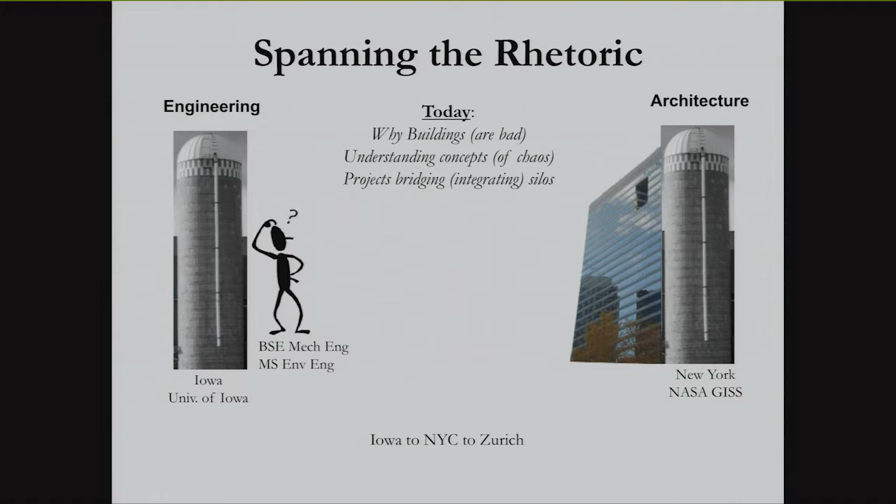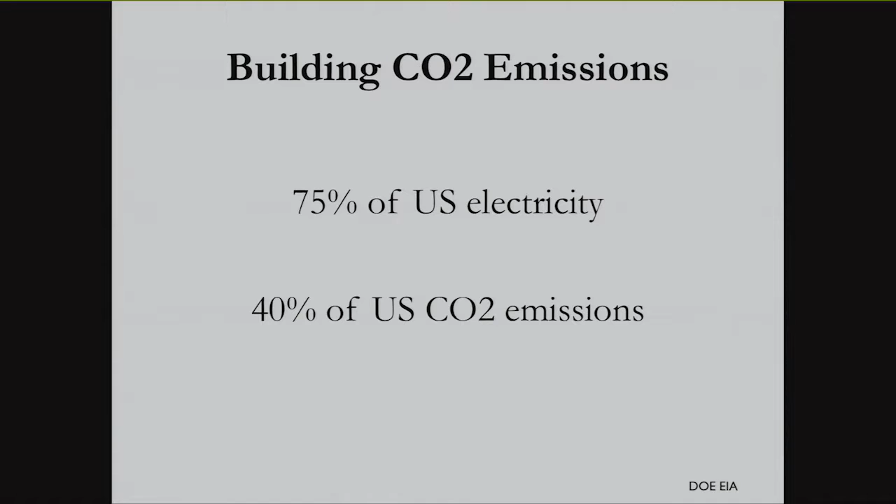So why buildings? Well, the obvious answer is that if you look at the data from the DOE, 75% of US electricity is utilized in the building sector, and around 40% of all the CO2 emissions is attributed to buildings. So that's a pretty easy motivation. But the problem is when you look at this big Sankey diagram of where all the energy goes in and then ends up producing carbon dioxide, cars are pretty easy. Oil in, cars drive, and boats and planes. It's pretty straight across. But buildings are everywhere.

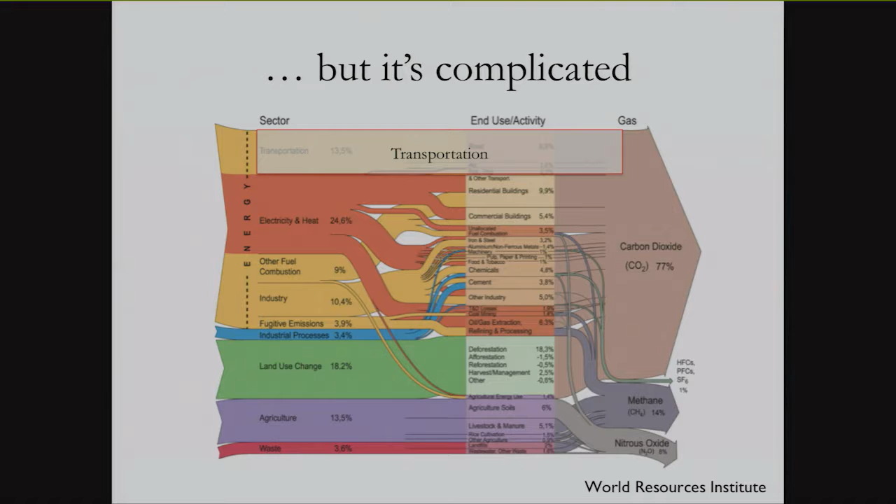Buildings are part of the energy sector, right? There's not actually one thing on the left that says buildings. There's residential, commercial buildings, there's agricultural aspects that involve buildings. So really it spans all these different places. And so in order to really address that, we have to think both holistically and integratively. So we have to think about opportunities that really span disciplines.

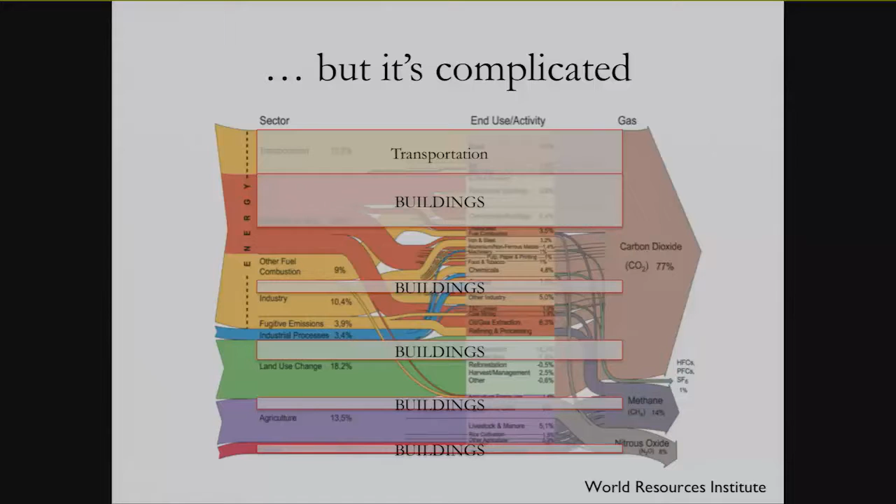Bridging as a theme for the talk today is something I hope we can all relate to and how we can address this problem, not just in the context of disciplines and areas, but also in terms of climate change and the ideas of mitigation and adaptation.

Buildings are large generators of emissions, as we just saw in the statistics, but they're also the parts of our infrastructure that are most vulnerable to things like temperature rise and sea level rise.

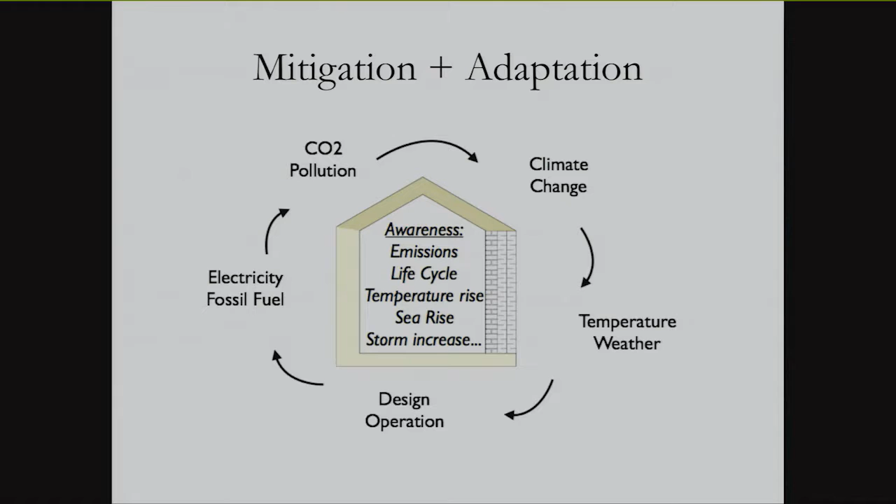One of the funniest feedback loops, if you think about climate change, is I have to understand how buildings lose and gain heat. When the temperature starts to rise due to climate change, that changes how we design buildings, which changes how much electricity they use, which then changes the CO2, which again changes the climate change. Understanding how buildings play a direct role in all of these aspects of climate change is really critical.

At the end of Ralph Cicerone's talk yesterday, we had this slide of the bell curves with the extreme events right at the high end of the temperature scale. So what is the worst case scenario?

In the context of our built environment and urban spheres, what you see here is Southwest Asia, the area of the United Arab Emirates. One of the fascinating things that comes out of the data when you look at what happens at the end of the century is, in the high emission scenarios, we have places on the planet - that whole purple section - where the temperature is above what you can physically survive, because the wet bulb temperature, similar to the dew point temperature, is the point at which your sweat doesn't evaporate anymore and your body can no longer cool itself down. So extended periods of time outside in these zones are no longer inhabitable by humans.

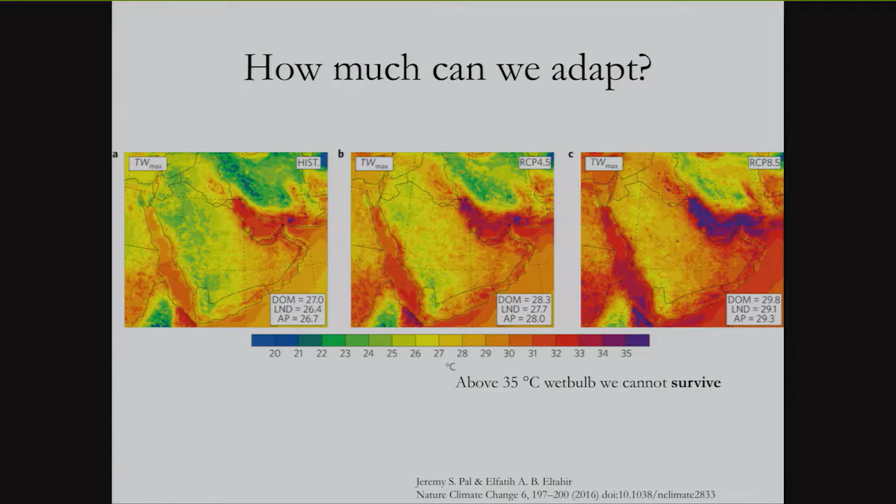The only way to live there would be in some crazy, hyper-futuristic, indoor air-conditioned environment. I don't know if that's something we all want. Maybe somebody wants to design it with me for fun in a studio in architecture - they would get a kick out of that. But I think as engineers, this is also a huge motivation into how we address the building sector.

But architects aren't so excited about equipment. And if you're going to have a building that wears a hat, you better have a pretty good reason why the building's wearing a hat if you're an architect. It can't just be because you want PV panels and to catch water. There has to be some sort of design motivation that's really powering their project.

Understanding that is really the part that my engineering side struggled with for a long time - that there are rational arguments that don't have to do with numbers and figures and data for why things get built and why we do certain things. I think that really rings true in this idea of behavior and how we as a society also need to understand all the different aspects, both the engineering and the aesthetic and the design components, and how those all blend together.

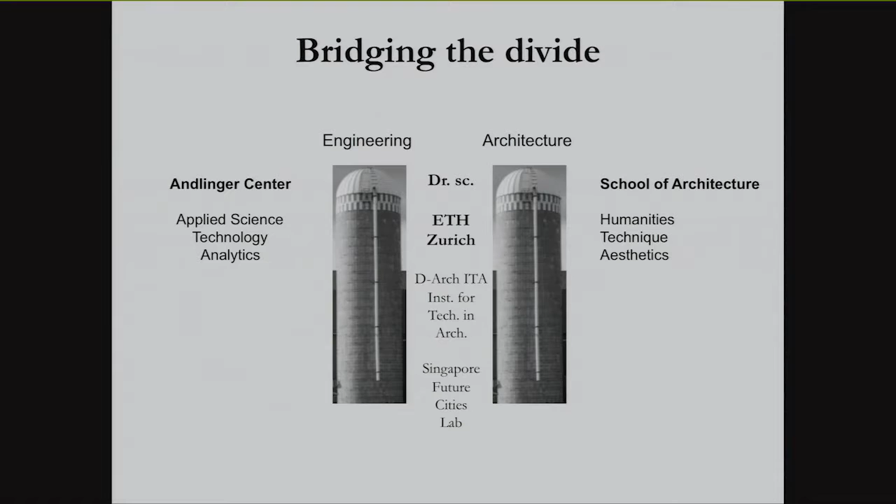The first place that I finally started to account for both these things was when I went to Switzerland and did my PhD in the architecture school in the Institute for Technology, and then moving on, continuing to work for the ETH in Singapore, really taking these two disciplines and figuring out one way that I could talk to both of them. The funny thing was, we ended up not making things simpler, but actually making things more complex.

So when I arrived here, we continued that theme, sort of in this idea of the chaos lab, because chaos isn't just an acronym, as Peter mentioned, which also I think Ellen demonstrated quite well yesterday - that acronyms are effective tools at communicating very quickly a project scope.

But for me, the acronym CHAOS, Cooling and Heating for Architecturally Optimized Systems, is just the tip of the iceberg. Chaos for us also represents this idea of thinking beyond the simple energy balances in buildings and the simple mindset of how buildings operate.

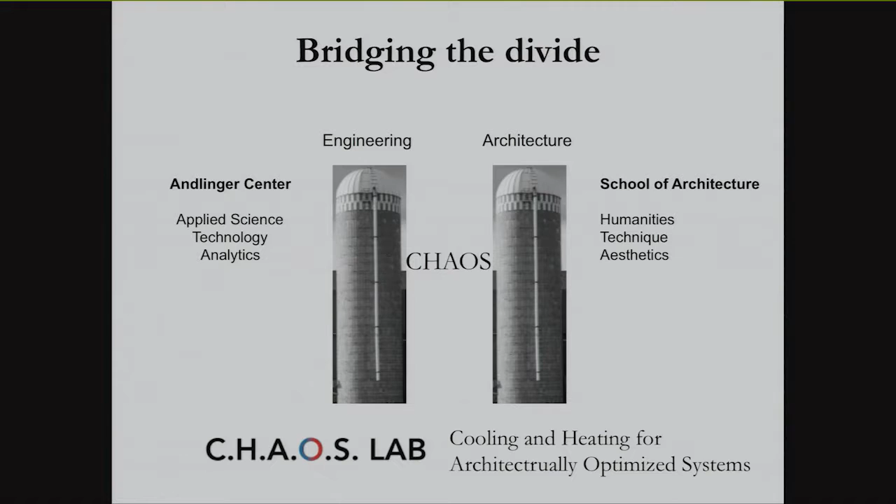So it has to do with entropy and this concept of combining the entropy and the second law of thermodynamics, how things dissipate into the environment, with the idea of energy balances.

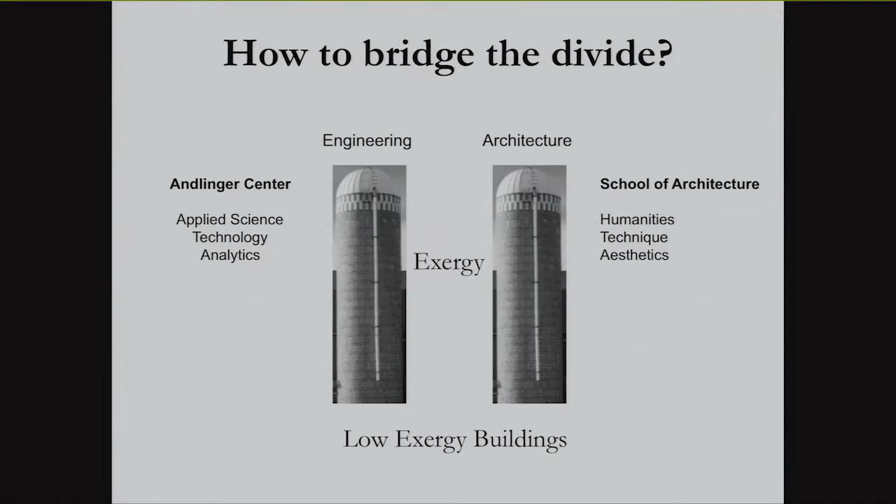The simple thing that we do to figure out how energy efficient buildings are is balance the amount of heat that we put in and the amount of heat that the building loses, and we try to minimize the energy inputs. But there are many steps along that process of bringing energy in and out of buildings that are extremely important.

So exergy as a tool ended up being extremely effective because the interesting thing was when we went and talked to architects about this phenomenon, all of a sudden energy wasn't this boring thing that they had to learn prescriptive metrics for. There was actually a phenomenon, something beyond the traditional mindset, which excited them.

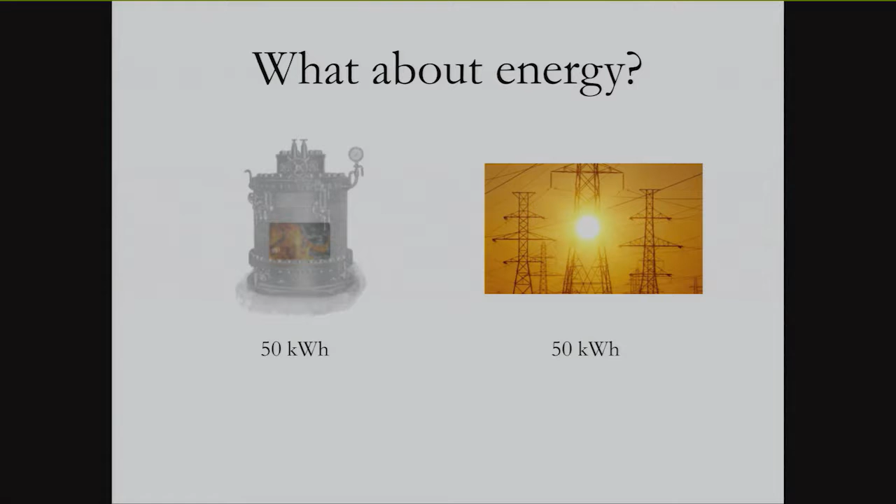We are actually very effective at communicating ideas like simple things about exergy being the value of energy. We all understand quite quickly that 50 Singapore dollars are not equal to 50 US dollars. We have a similar problem with energy. We can have 50 kilowatt hours of heat in a boiler and 50 kilowatt hours of electricity.

But these things are not really the same. I can do a lot more with 50 kilowatt hours of electricity than I can with 50 kilowatt hours of heat. There are fundamental limitations in the second law of thermodynamics that tell us how much I can extract from certain temperatures in a system.

So in general, when we quantify, especially at the district scale, district heating systems and electricity grids, we often just add up joules or kilowatt hours, but we don't necessarily take into account what the temperatures in the systems are.

That's something I'm working directly with facilities on now, thinking about the campus steam system and the district cooling system that we have on campus, about how we can really optimize those in our campus as a lab.

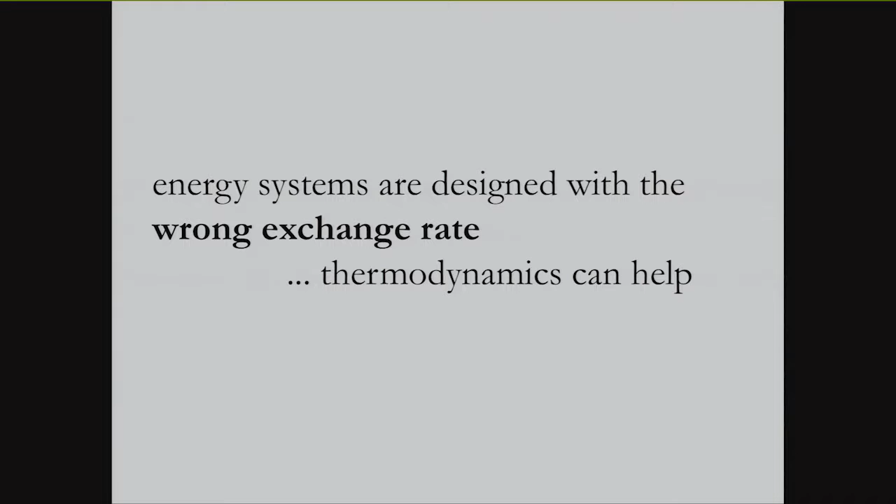The main part, not to delve too much into the details, is entropy just allows us to create a new part of the energy component where you actually have some loss in the ability to utilize the energy that you have in a system.

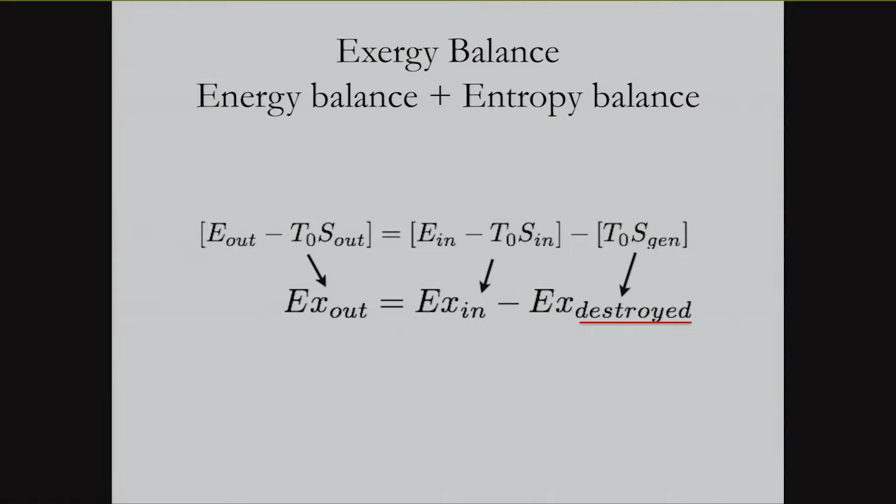So you subtract the amount of entropy generated in this system. The main thing to take away from the equations, when I apply this to a building, is that the temperature differences matter — as I bring heat into a building, I need to make it warmer so that the warm heat transfers to the colder space. The warm, hot temperatures transfer to colder temperatures. And the exergy part is really just that temperature difference.

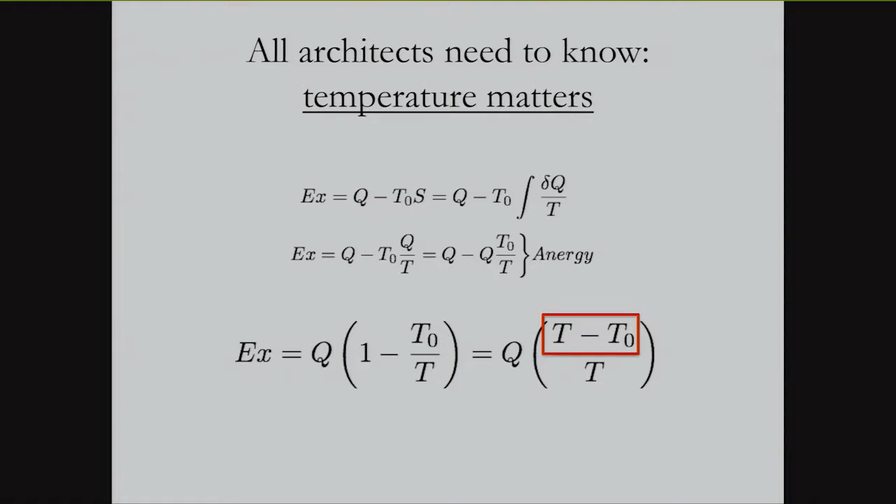The big take-home message, which has been really effective both in engineering and architecture, is that if we design buildings just with simple energy balances — here you see a 98% condensing boiler system, where just 2% of the energy is lost out of the stack and all the heat goes into the building — the difference is, the heat in the boiler is about 1,000 degrees, but the room only needs to be 20 degrees. So there's a huge mismatch in the quality of that energy.

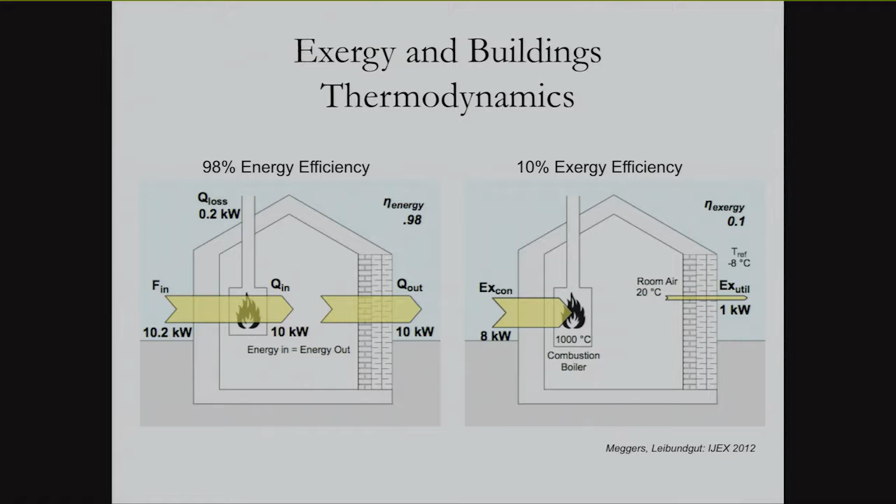So the exergy that was available in that combustion would be much better used for another process that needs that high level of quality in its system. For my research, one of the big areas is how we combine systems that bring those temperatures closer together. That's why ground source heat pumps are great opportunities — the temperature is much closer to the room temperature than, say, a minus 8 day outside.

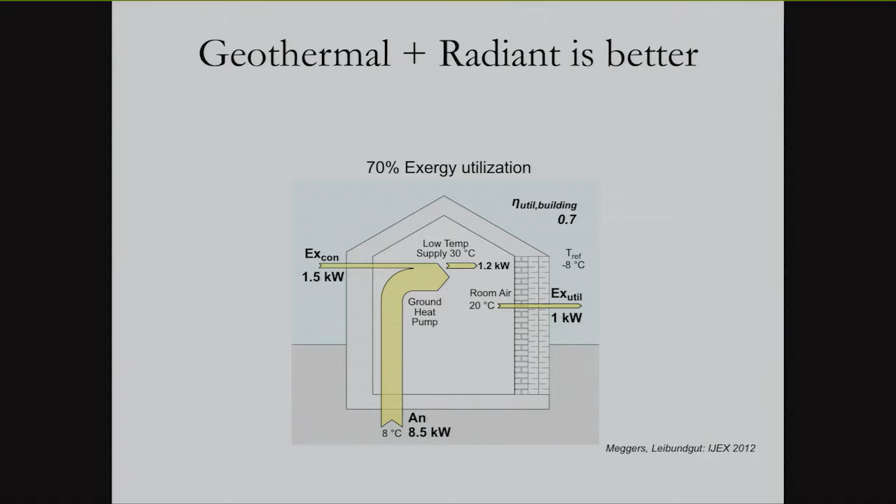And same with the emission systems in buildings. If we use large surface areas and radiant systems, like we have here in the Andlinger Center, which I'll talk about later, we can understand how temperature really matters. That's the simplest message we can deliver to architects and engineers in this context.

So I can design the surfaces in this room to emit the same amount of energy as the little diffusers, if they're large enough, because the amount of heating or cooling I can give to a room is limited by the temperature difference and the surface area.

So if I make a big surface area, I can make the temperature difference much smaller. But unfortunately, this fact that temperature matters is problematic in standard systems. This was something I experienced directly in Singapore, and we're continuing these thoughts with Elie Bou-Zeid and Jim Smith.

in this Sustainable Research Network on urban water, in the context of how latent heat transfer happens with all these different devices. The main thing in this project was, what do you think happens to the heat from this air conditioning unit? It goes this way, right? And all of these units' efficiencies depend on the outside temperature. But do you think it's the outside air temperature around these units? It's not. So these units are working way harder than others.

The other thing is this whole area also gets hotter, and we have a whole project about back lanes in Singapore showing there's a huge opportunity to not only increase efficiency but reclaim this space that nobody wants to be in, because it's 10 degrees warmer than the regular outside temperature.

We also took those systems sitting on the wall there, just tacked on, that people can buy in any DIY hardware shop in Singapore, and thought about ways we could integrate them better into buildings, because even the large buildings and apartments I lived in still use these standard systems.

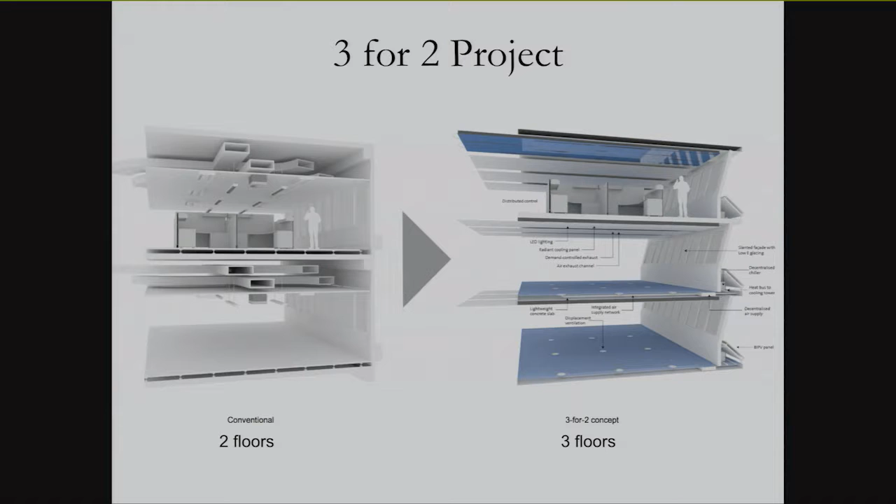In this case, we also explored opportunities to directly integrate the compressors and air intake systems into the facade structure, so we're not ducting things any further than necessary, which allows us to create even smaller ducts with fewer losses.

When we modeled this in larger high-rise scenarios - we just had a paper come out 2 weeks ago in the Council for Tall Buildings journal - it showed we can save energy because we diminish all the surface area on the outside of the building. Remember, those 2-meter spaces also had surface on the edge of the building. We get rid of that surface and reduce all those heat gains.

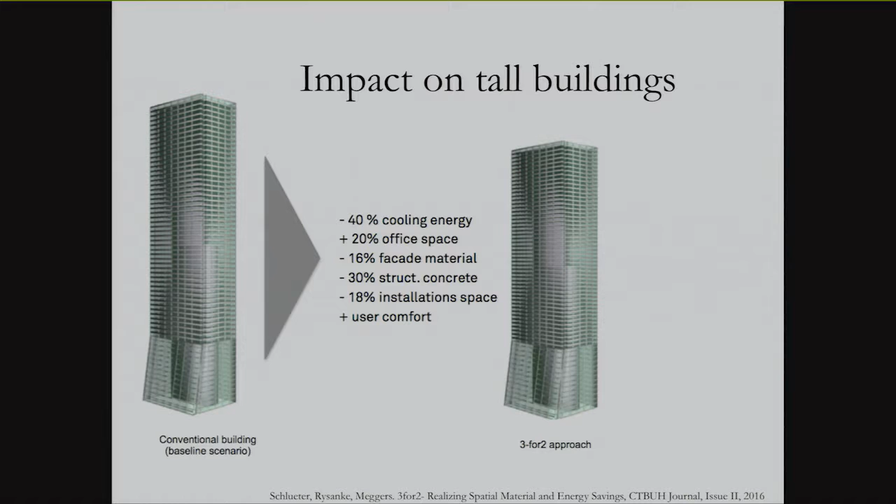So we save 40% of the cooling energy, we get 20% more office space because we don't have all those ducts - both the vertical chases and the ones running through the ceiling. We also save tons of material and increase user comfort through this radiant cooling system in the building.

So this was the end result of the space we designed and implemented at the United World College, which they very generously allowed. This is one of the hardest things about doing research in buildings - buildings are in fact the most expensive thing someone can buy.

So if you're going to sell someone a building, you're not going to say, I have this thing that I think just might work maybe - we haven't really tested it, but can we put it in your building? Luckily, we found a project manager who was pretty proactive in Singapore, and we were able to actually deploy this project.

These are high temperature cooling panels in the ceiling of the space, distributing the cooling over large surface areas.

And we're looking at the next step: understanding how do we deliver this. Anybody who's been to Singapore will know about this challenge, dehumidification, because it is humid there. The temperature is rarely above 85 degrees, but the humidity is always above 80%. So getting rid of moisture is a big challenge.

The way we traditionally do that is by cooling the air down beyond the dew point, causing water to condense out of the air. But we can also do this using intelligent chemistry. We've been doing a lot of research with chemical engineers, including one chemical engineering grad student I convinced to come work with me on the architecture side, to develop new desiccant-based dehumidification systems.

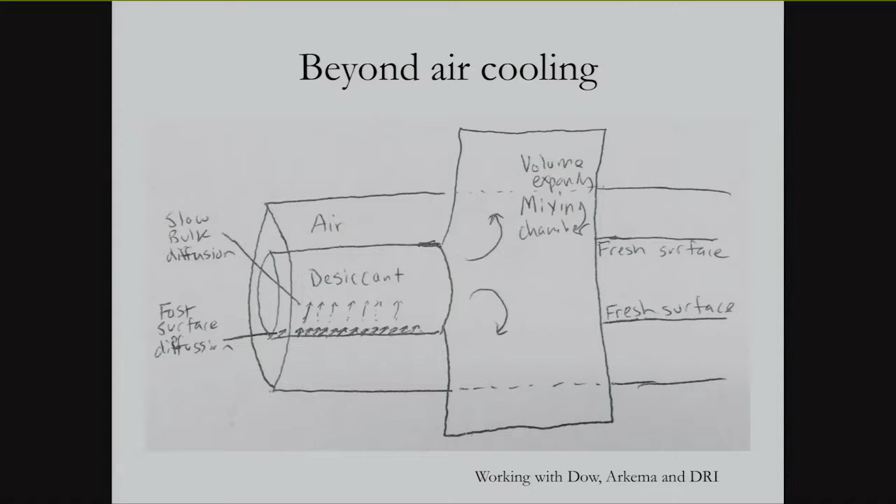This is an early sketch of a prototype we built. Through one of the e-affiliates meetings, we met people from Arkema who supplied us with a perfect non-porous membrane, because the desiccant we're working with we were able to get, through another industry meeting, from Dow. So Dow has this desiccant they wanted to try out, and we got this membrane that allows moisture to transfer through it but keeps the desiccant hidden behind it.

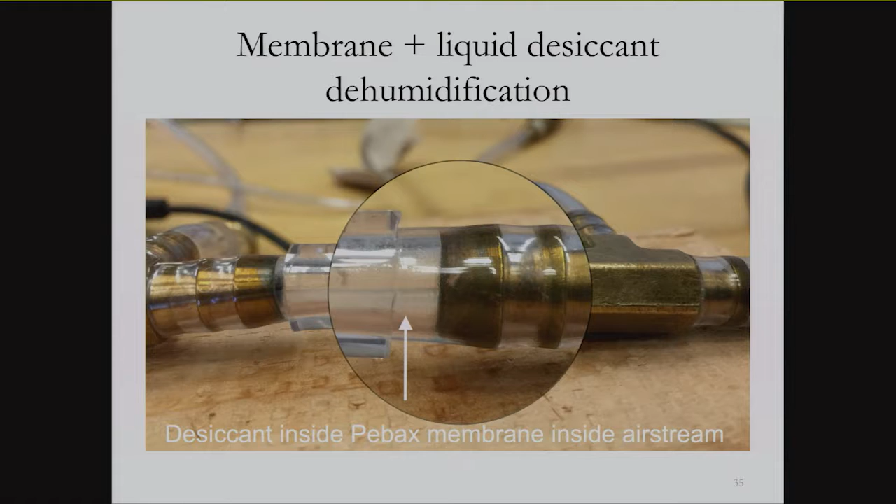In that way we can transfer moisture in and out of the liquid without having an open or free surface. One of the biggest problems when you use desiccants to pull moisture out of the air is that free surface, and the air isn't just air, there's dust and other components. So this is one of the things we're designing right now to address this problem, and collaborations with chemistry have taught me an immense amount.

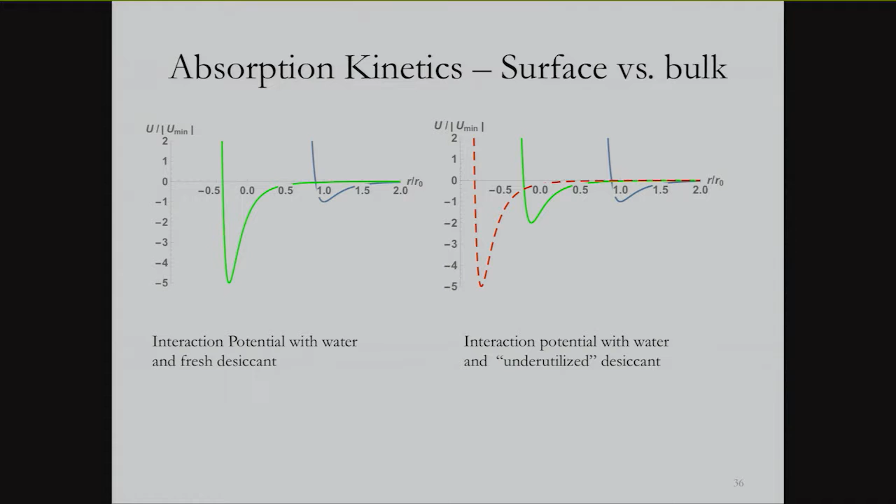We've had a lot of help from Bruce Koel as well as Jay Benziger about how the kinetics work in the system, and how we can optimize the removal of moisture from the air in buildings. My part of the system is to come back and say, okay, the really neat opportunity would be...

Now let's design something where we have photovoltaics on the facade. Photovoltaics get about 20% of the energy from the sun, at best, converted into electricity with market types of PVs. But they also generate a lot of heat, and that other 80% of incoming energy can be used to regenerate those desiccants. So it's nice to think about a system where, instead of subcooling air to condense water out, we heat up a desiccant to remove moisture from the building system.

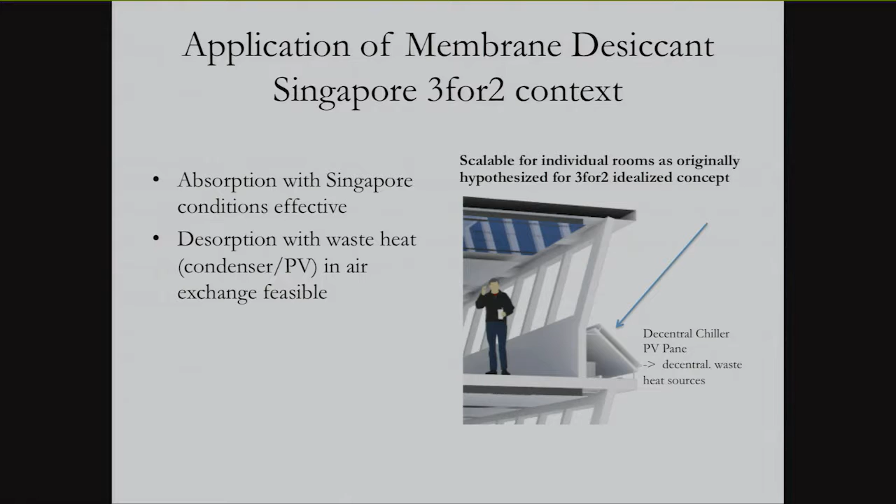Because what do we have a lot of when we're doing dehumidification in Singapore? We have a lot of heat. So let's use some of that heat to drive our system instead of doing subcooling. The initial results from the desiccant we're working on are pretty promising in terms of achieving realistic temperatures, so we're really excited about that.

I want to jump to one more project, or a couple more projects, that are really more on the level of the interdisciplinary nature, and how, in my role, that last part of the project where we design something is really where we get to do this innovation through integration - taking the structural parts of the building and these chemistry equations and bringing them together.

So we made a proposal, and it seemed a little far-fetched, but in the end, it all fit together just enough that we were able to do experiments and demonstrate that we could, on the top right there, in fact, store charge in concrete. The biggest challenge that remains now is to keep the charge there.

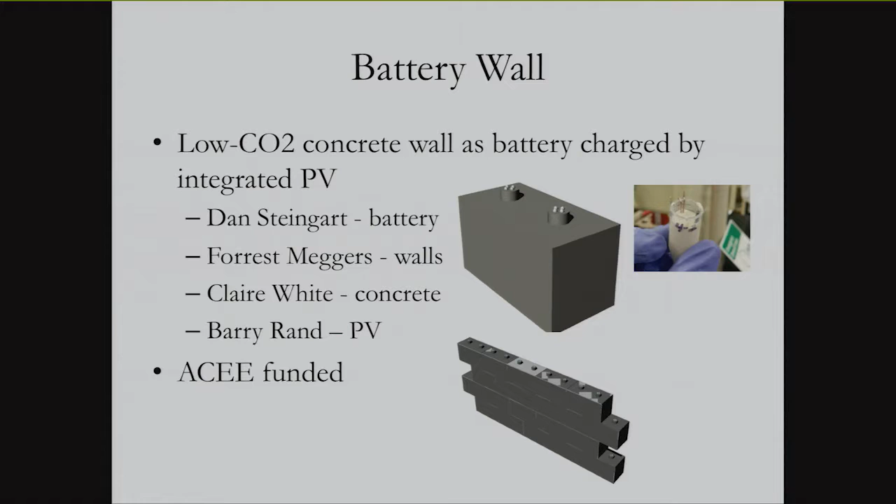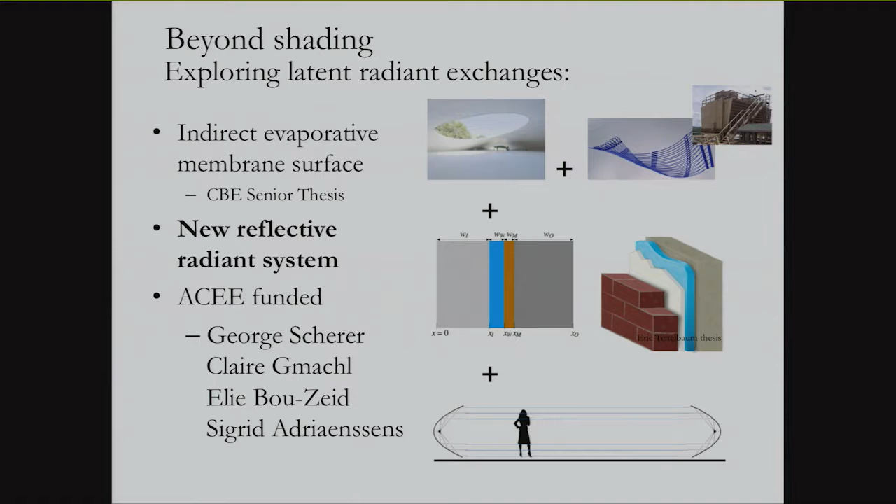The other project that I led, which this project and the battery wall were both funded by the Andlinger Center, and in this case, I was leading the charge on an idea about how to combine evaporative cooling with the reflection of radiant heat transfer. And ideally through this, we'll arrive back at the sensors that I'm passing you.

The first part, which I'll just touch on briefly, is the idea that you can do evaporative cooling directly on the walls of buildings. This is something that Elie Bou-Zeid in civil engineering and I have been talking about a lot, and thinking about ways that you can encapsulate water in building facades.

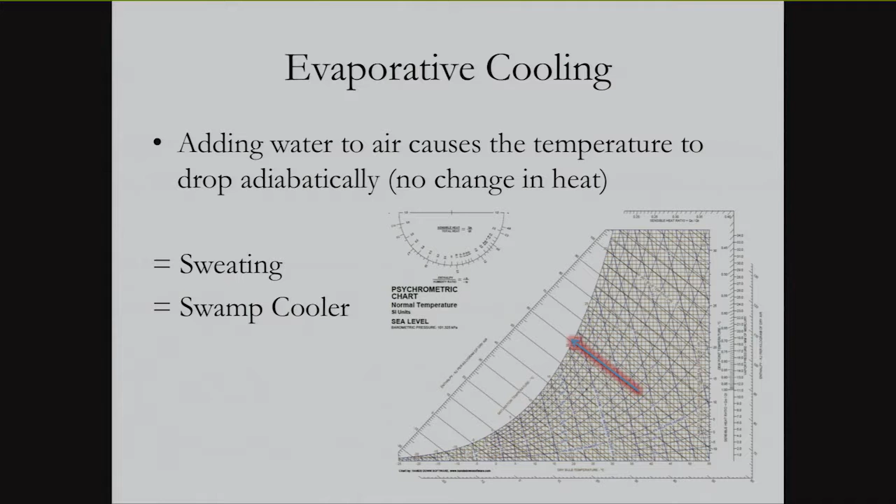But in the project that I worked on, we did what's called indirect evaporative cooling. Because in New Jersey, if you buy a swamp cooler, it's not going to help you much in the summer, right? 70% humidity, and that maybe cools the air by 5 degrees, but then it's 100% humidity. That's not much better. But if I take that 5-degree cooler air and do another heat exchange with some air that you didn't add moisture to, now you have cooler air that you can use in your system.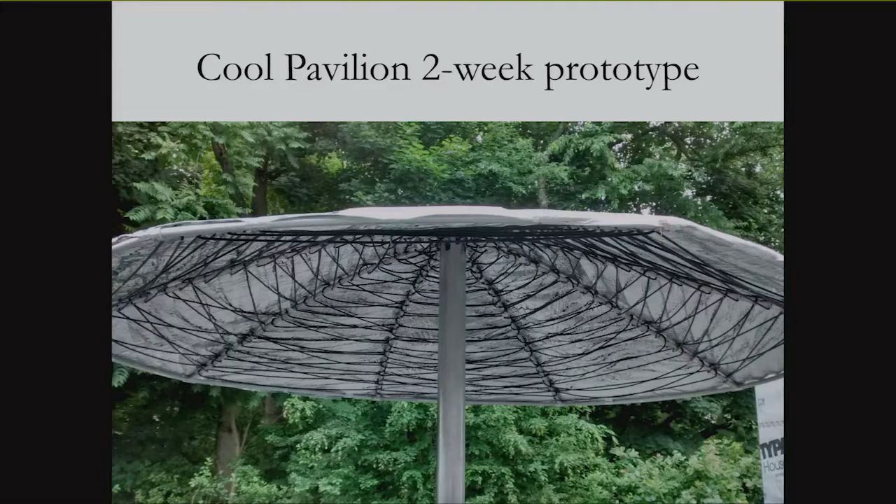And that's what we did in these prototypes that we built, that focused on reflecting then that evaporatively cooled, indirectly evaporatively cooled fluid that we have in the system.

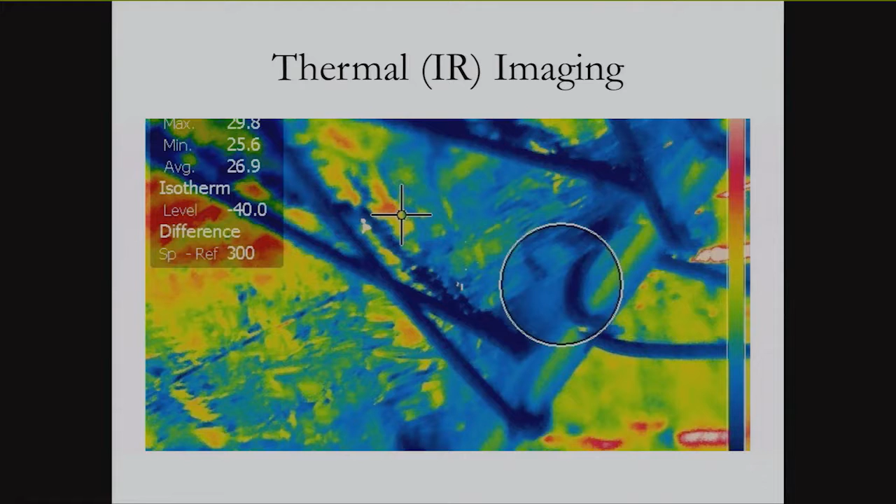And this was the first prototype that my students built in remarkably 2 weeks. Architects are extremely good at fabricating things. Unfortunately, though, we found that the reflection underneath this little umbrella was not very effective, so we had to come up with a better plan, one that involved more geometry.

And this is where really the architects sort of took the lead and helped to develop a geometry where we did a bunch of ray tracing and figured out, hey, if we try and build a parabola in this image, what we want to do is reflect all the heat off of the people onto a really cold pipe.

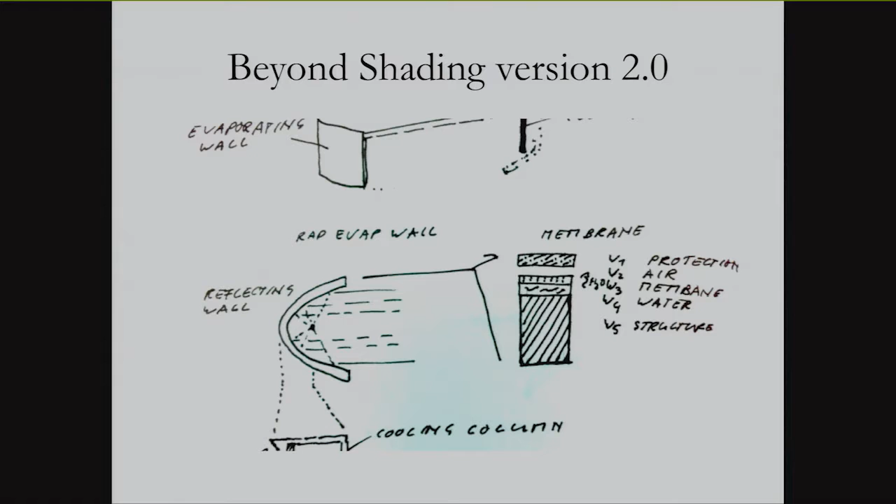So you all are emitting heat, and I can make you feel cold if I just surround you with a big, huge chunk of ice, because you'll radiate heat, even if the air temperature stays the same. So the whole point of the project is to absorb radiation from people and focus it on cold things. But we emit radiation in every direction, we don't emit it like a beam. So we had to come up with a way to capture all that indirect, those off-axis rays.

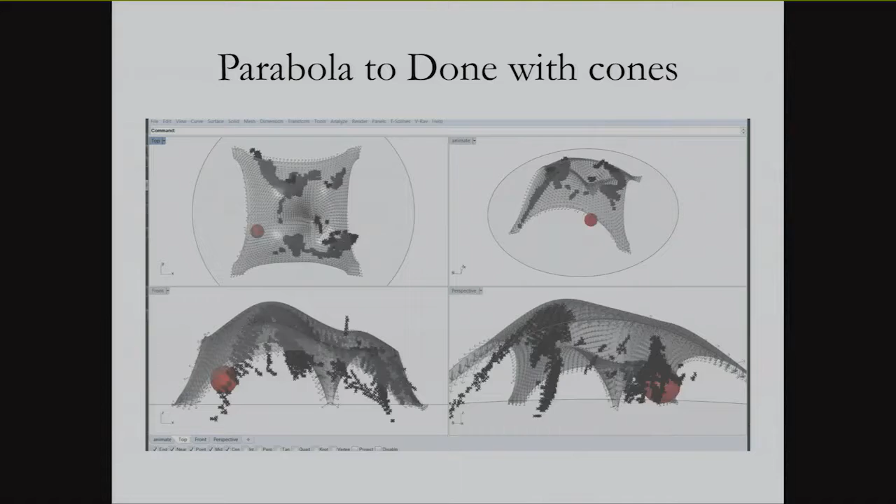So we built a cone so that the light that comes in at different angles all bounces off the cone and hits like this stick in the middle of the cone. We did some fun optimization of different forms where we found where the ray tracing could focus in a system, but the cone tended to be the best solution.

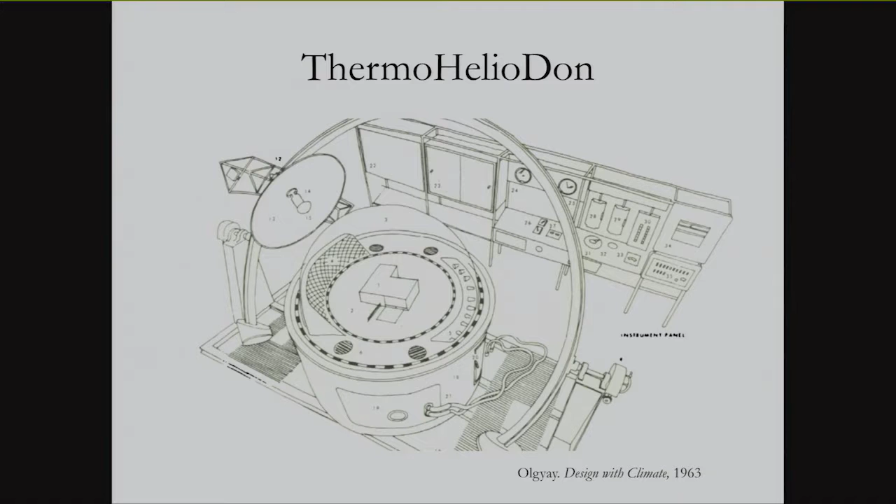And in an homage to the 1960s, when professors of architecture were doing research on energy and built this device to simulate the sun, we also created a structure. So this was the moment where we didn't just build a building with a hat, we also thought about the architectural relevance for a little while. This is actually the sun path on the summer solstice, so it shades the space underneath exactly.

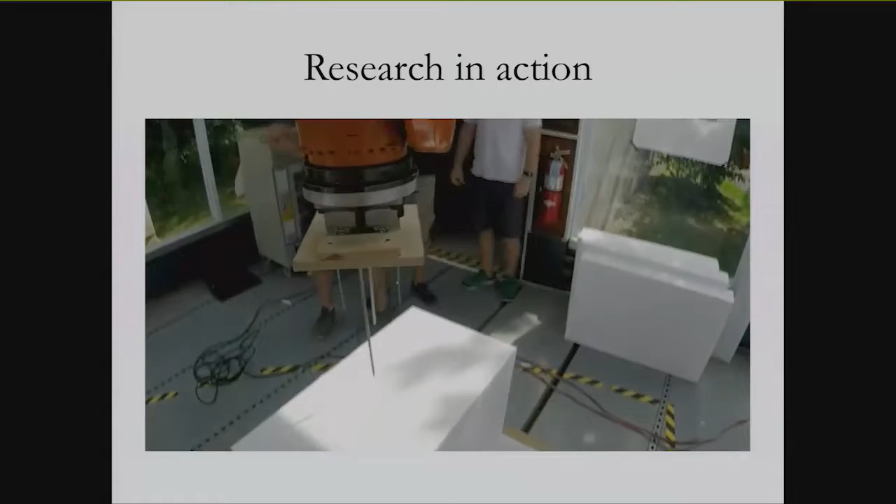And then we had to build it. The process was pretty straightforward, because if you're in architecture these days, you tend to have very fancy equipment that allows you to digitally fabricate very specific forms. So here we have our industrial robot in the architecture school, which we can program to then make very precise cuts of these cones.

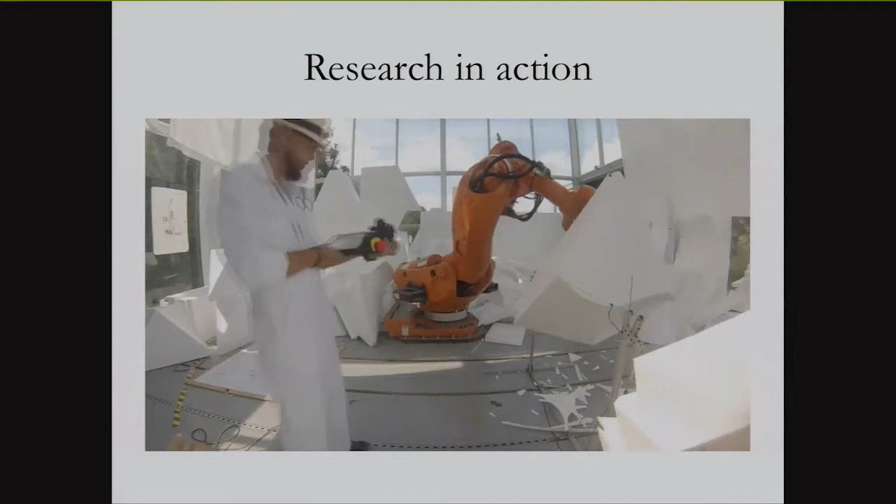So these cones then are formed out of a bunch of blocks using a hot wire cutter on styrofoam. And by having the ability to take that geometry and pack it into these 24-foot-long blocks of styrofoam, which, by the way, I also figured out how to recycle, because as a child I was also told never buy styrofoam, it's bad. You can actually recycle styrofoam these days.

So all the offcuts were recycled, and we were able to create 126 of these blocks in a series of 6 different types that then stack together, as you see here, on its back to create all these forms. And as we stack them, we put these pipes in the middle that were coaxial pipes, so there's water flowing down the middle and then comes back, or down the outside and then flows back up the middle.

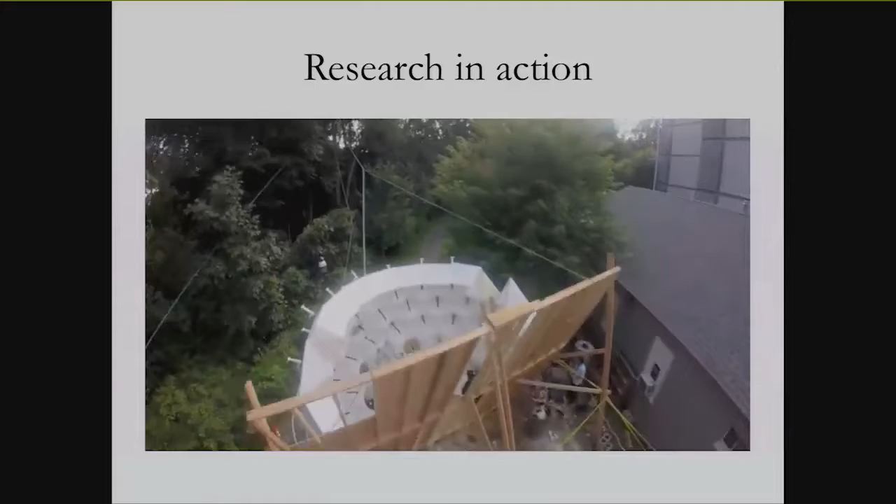So each of those black sticks are where the evaporatively cooled water goes. And we're able to then generate a system of supply and return that goes to a very small evaporative cooling tower that's located next to the system. So here's the moment of truth.

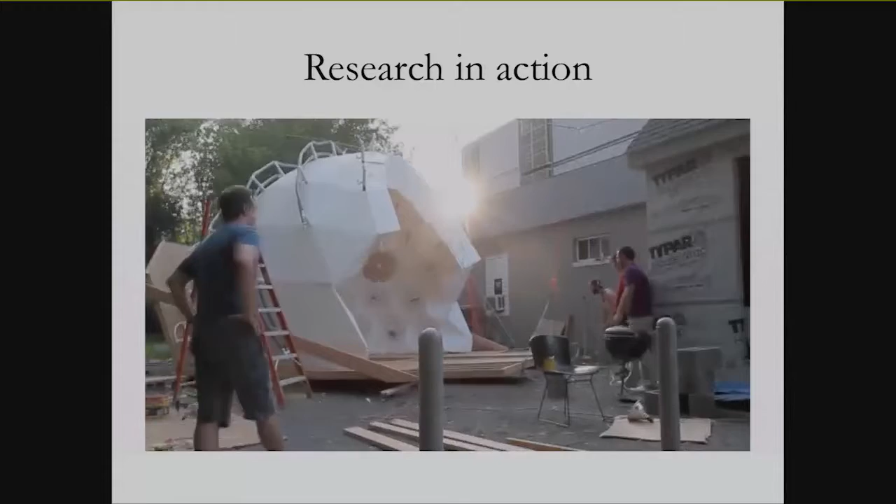That was bringing the system down after we put all the pipes up, and here you can see it in its final form, where we then tested the emission of radiation across these different cones that we had created. So as you can see here, is when the cold water is coming into the system, and we're tracking what the temperature is with, in this case, a small sensor that we developed to be able to see the entire temperature inside of the dome.

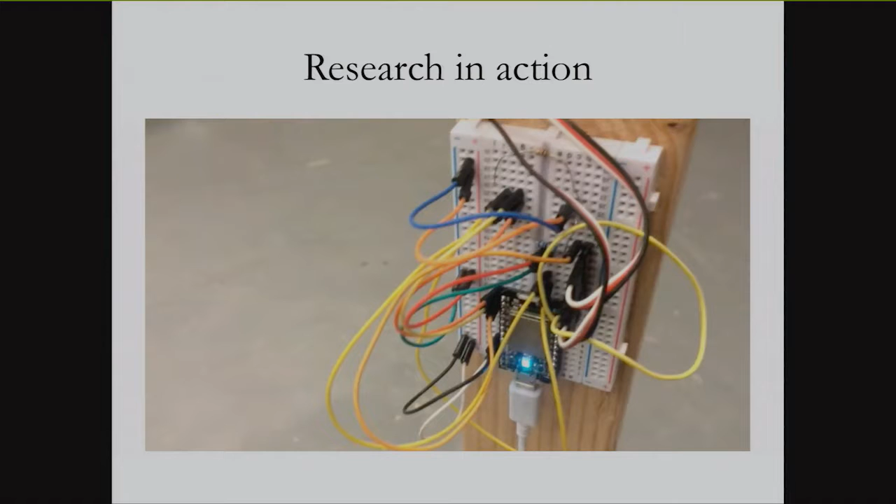Because with one of these infrared cameras, one of the biggest challenges, the reason that these still cost a couple $1,000, is that you have to pay for this germanium lens, and that's really expensive. And because of that, you can't build a fisheye lens on an infrared camera. So we built a new sensor that allows us to see the entire inside of this dome and stitch it all together. And here's the team that helped.

This was a group of architects, mechanical engineers, civil engineers, chemical engineers, and in the back there, even a couple high school students that helped over the summer. And the 2 postdocs that work for me, I'm proud to say, are both faculty members now at Berkeley and in Melbourne, and we're still collaborating on these types of projects.

And you can see after we had the building set up, we also checked with occupants to see whether it was actually colder. This was a slightly biased occupant who's a farmer from Iowa. I think I know him from somewhere.

But we did do a survey, and we actually reached out to the psychology department, Sander van der Linden, to make sure that we were asking the right kinds of questions. And this is the official comfort scale. Some of you may or may not have heard of this perceived or predicted mean vote in terms of comfort. But we asked people, and one of the key questions I want you to remember, for those of you that have played with the little thermal camera I was passing around, is this idea of what is the temperature you perceive in a space, right? Because this is something that we all think we have a good sense of.

But the main result from the survey was that we did, in fact, have a perceptible cooling effect using only evaporation going into these small pipes. So this is a pavilion outside, so by having the cooling only go through these little pipes, we didn't have a large surface area that was actually cold. So the small surface area lost very little of its cooling capacity to the air, but when you stood in there, you had the full surface effect of the radiation around you.

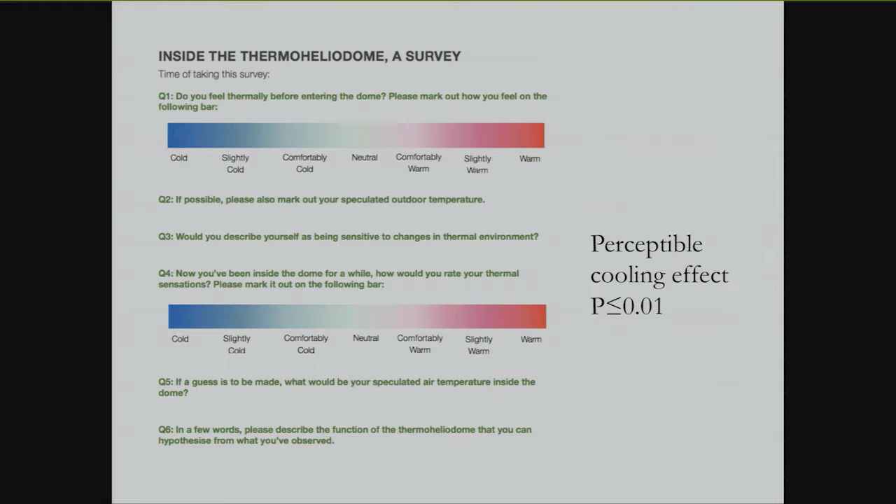So you would feel like you were standing in a space where all the surfaces around you were cool. In the case of a day where it was 70% humidity outside and 85 degrees, we dropped the water temperature down to 70 degrees, and we were able to distribute that temperature around the space radiatively.

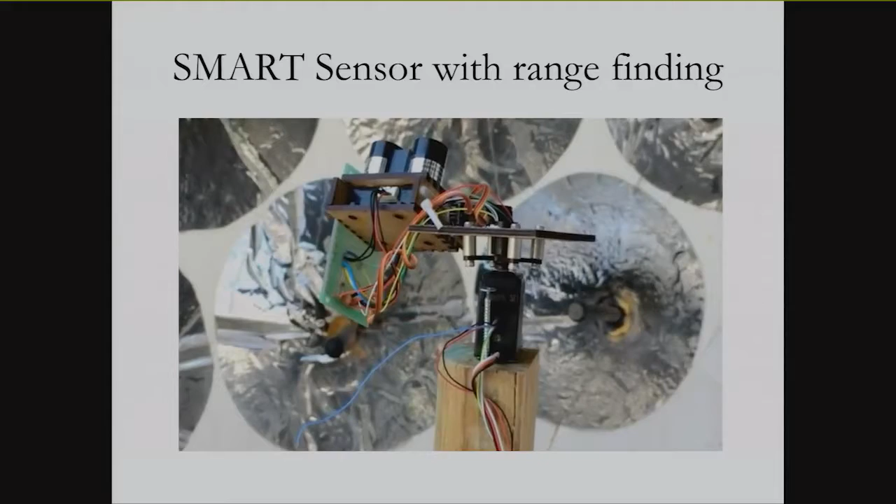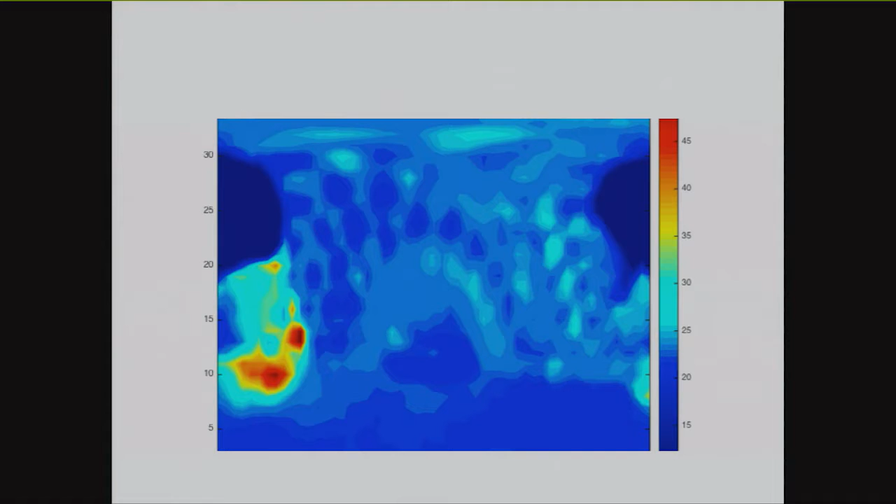So the end result is that we built this sensor that we're working on now today, a spin-off of this, which we've now patented, this little device that does not only scanning of the temperature in the whole space, so it adds up all of these temperatures, but it also does range finding with the LiDAR sensor. And so we're able to see the temperature inside the dome in a full 360-degree view, and we're also able to plot that in space.

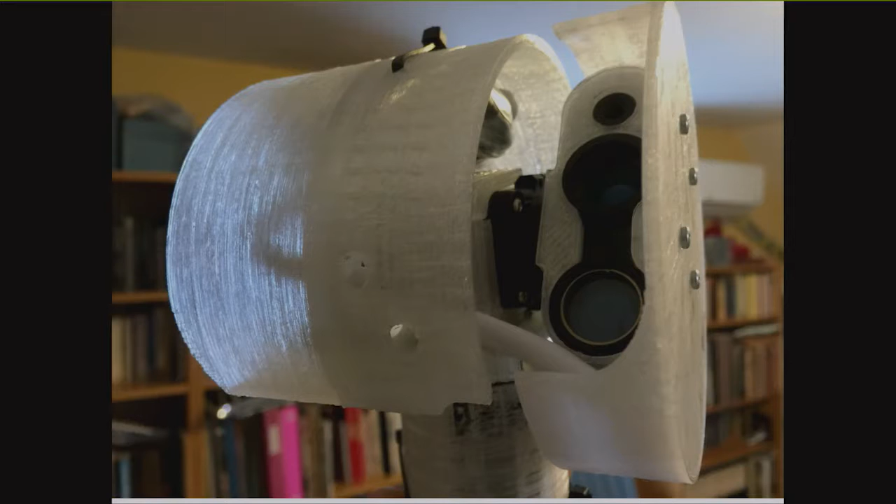So with one scan of a room over 5 minutes, we can see the whole system. And this is something now that we're working on developing as a device both for fault detection or diagnostics in buildings, but also as something that can replace the standard thermostat in a building that only measures the air temperature, right?

Because remember in our survey we asked what temperature do you think the room is? Well, a building only thinks about the air temperature. It never thinks about that radiant temperature of its surfaces. And these types of devices allow you to scan the room, and this is another one of the rapidly prototyped versions as I hand it around.

And this one will look at the distance of the system, but the one I passed around will be able to plot the room space in a small enclosure located on the wall, producing this type of result, whereas if I have an existing building, I know the geometry of the room, and so I can produce this data just using a sensor that looks at the room.

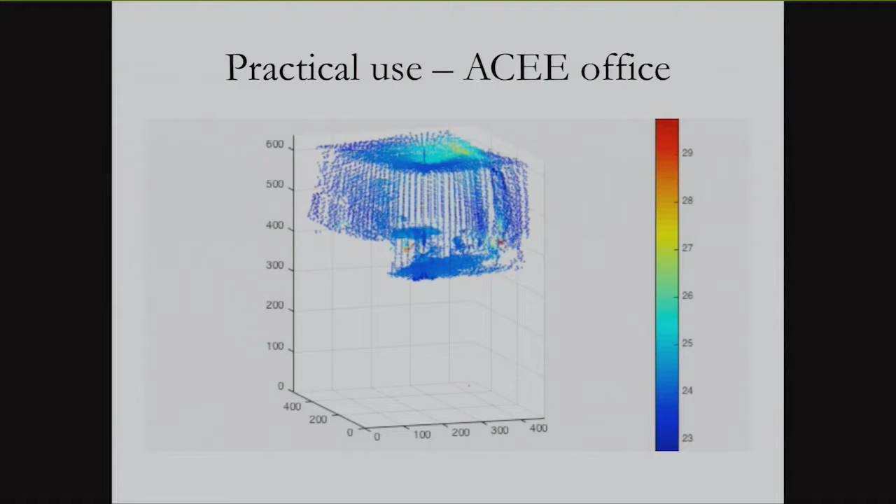And with the LiDAR one, this was produced directly where that little device sits in the middle of the room, scans around it, and produces instantaneously the geometry of the room and the temperature of all its surfaces. And this is very valuable because as we demonstrated with the thermoheliodome in a very extravagant form, radiant surfaces are really important in buildings. And this does apply to real buildings, this very building here.

This building has radiant cooling panels and a lot of thermal mass. And both those things, thermal mass, in this case all the concrete in the stairwell, and the radiant panels in the hallways, that's what you see above you, those metal panels all have copper tubing behind them. And what that does is both the thermal mass and the radiant cooling are able to maintain their temperature at a much more constant level. And so by doing so, we can skew your perception of the air temperature.

Because in fact, you are all very, very bad temperature sensors. You're really good heat flux sensors. Unfortunately our beautiful chairs don't have any metal on them anywhere. But if you touch metal, it feels cold, even if it's the same temperature as the table or chair that you're sitting next to, right? And you feel that way because you sense the rate of heat loss.

And I can change the rate of heat loss from your body with my thermoheliodome or with the radiant cooling panels in the Andlinger Center. And so our building is, in and of itself, this great campus as a lab project where I can see in action some of the types of systems that I'm researching. And I can also then look at the data from our thermostats, and in our very own graduate space, we're able to show how this works.

So to wrap up, the ability to use our own building and to have my own graduate students be able to deploy this very sensor and then show to all the grad students that are with them in the space, this is why we feel cold, even though the air temperature we're measuring is 70 degrees.